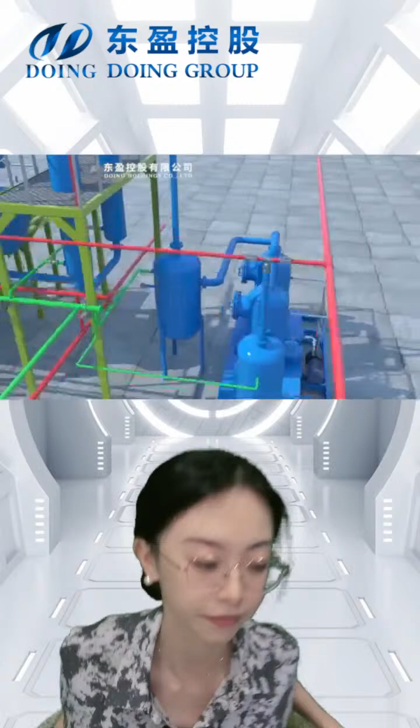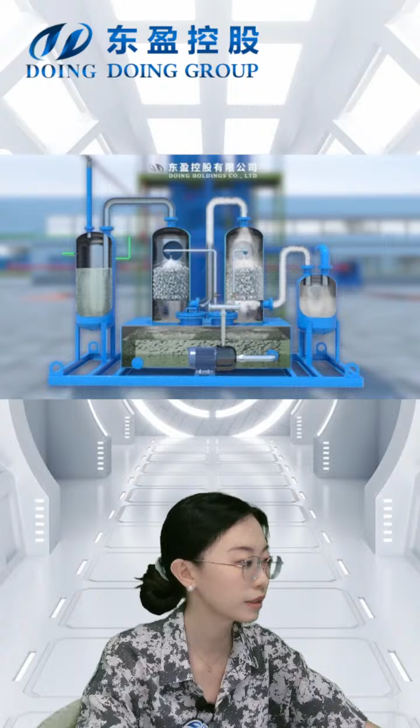Welcome, we are the Doing company, and we are a company manufacturing equipment for the transport and processing of waste tire and waste plastic pyrolysis plants.

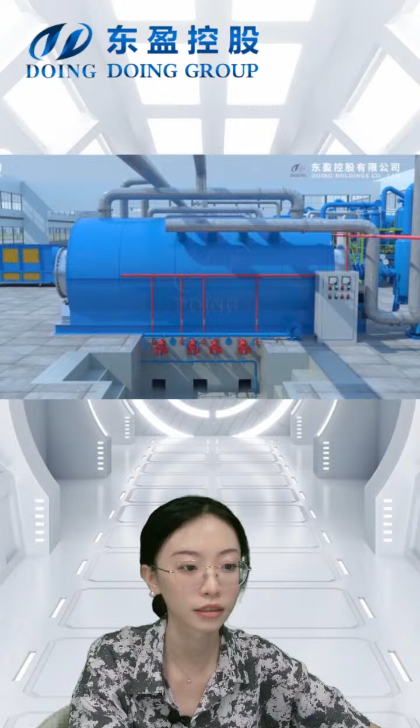We're just on air, so you can wait a moment. Today we're going to have an introduction of the full continuous pyrolysis plant, the batch type pyrolysis plant, and the semi-continuous pyrolysis plant.

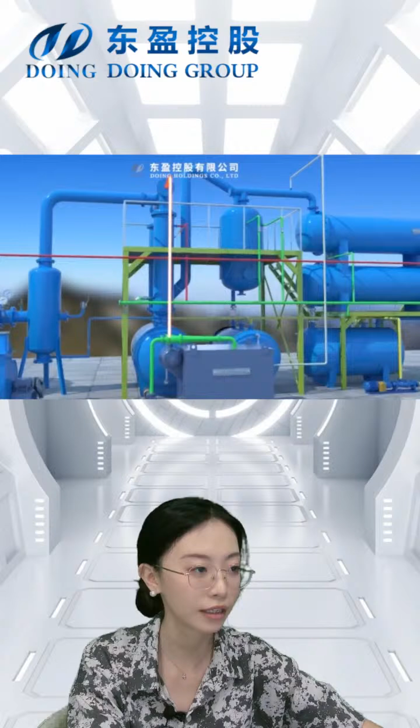If you're interested in this project, the pyrolysis oil project, you can come to China. You're welcome to come to our factory, to our company.

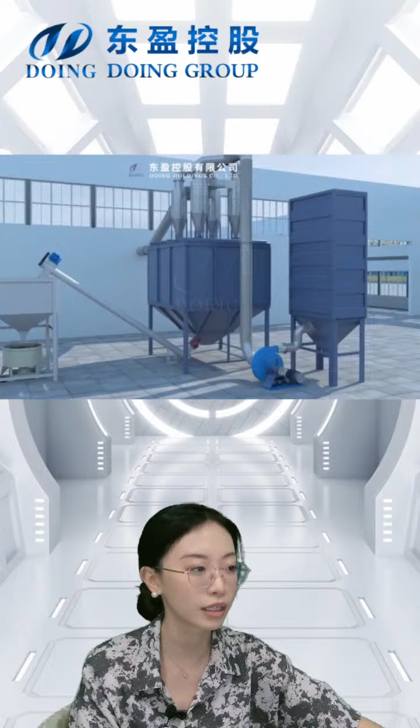Today we're going to introduce the main product of our company, the full continuous pyrolysis plant for waste tire and waste plastic. If you're interested, you can wait a moment, we are just on air, waiting for more friends to join our live show.

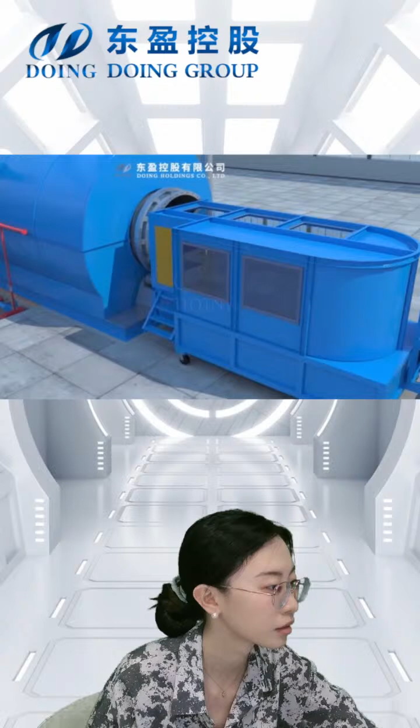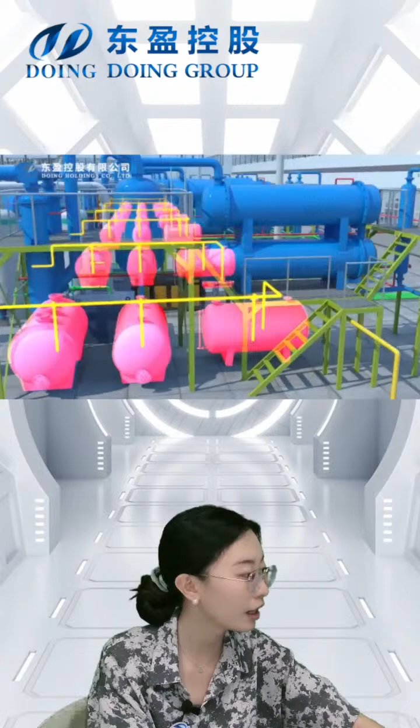Welcome, we are the Doing company. Our company works on waste tire and waste plastic pyrolysis plants, and we are located in China, in central China's Henan province. We are located in the capital of Henan province, Zhengzhou.

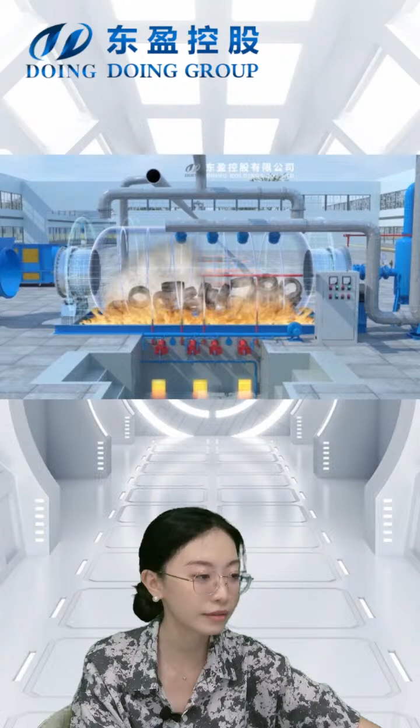And if you want further refining, you can get diesel from the pyrolysis oil. The diesel can be used in ferry boats, steamships, or heavy agricultural machines. So you can see our oil can sell widely and have a high profit.

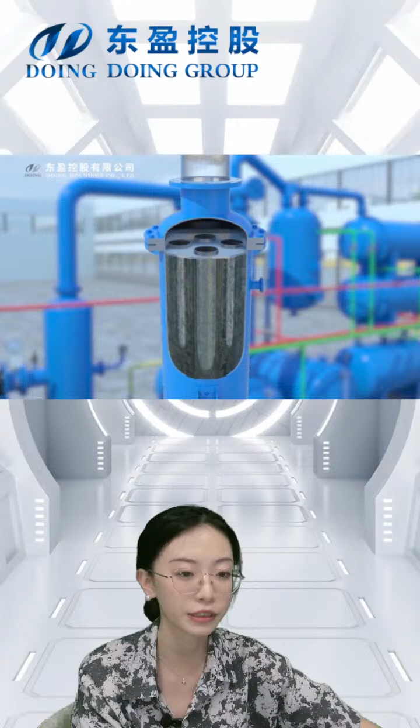Today I'm going to introduce our full continuous pyrolysis plant and the batch type pyrolysis plant. The 3D video above me is the batch type pyrolysis plant, so you can get an introduction about how this whole product works.

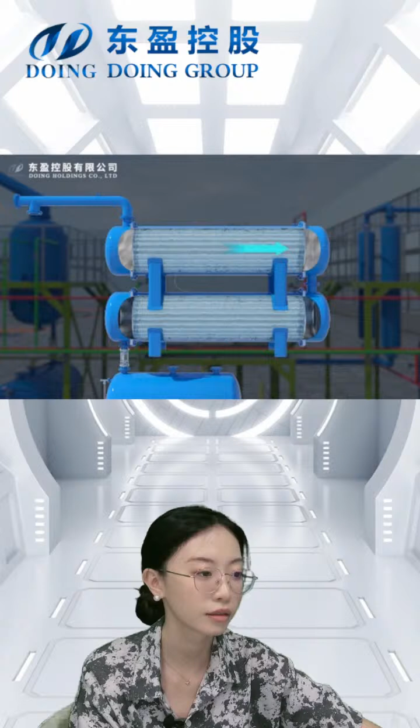Our company was founded in 2011, and we have a history of 13 years. We have had our own factory since 2018. So we have set up a good name and reputation in this industry, so you don't have to worry about the quality of our project, our manufacturing.

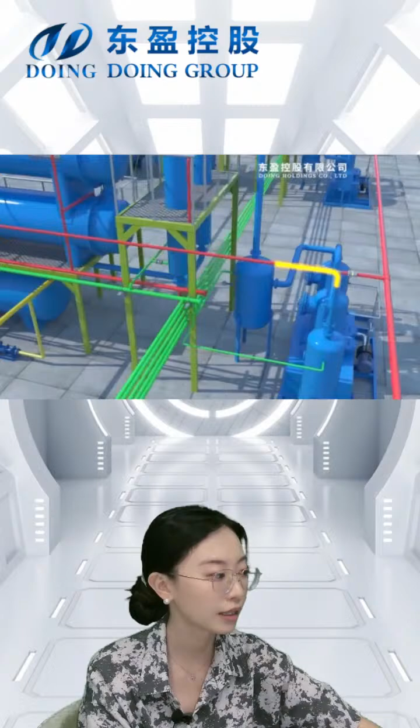About the oil yield: after pyrolysis, for example with waste tire, the oil yield can reach 42 to 45 percent. For plastic, different plastics have different oil yields. If you have pure PP, PE, or PS, the oil yield can reach 90%.

If your material is like paper mill waste, it depends on whether you have much water in your material. Dry material can reach an oil yield of 60%, and wet material can reach 20%. So it's all due to your material.

Maybe you are interested in the prices. We have different capacities of our machines and different types. For the batch type pyrolysis plants, we have 10 tons, 12 tons, 15 tons. For the full continuous pyrolysis plants, we have 10 tons, 20 tons, 30 tons, 40 tons, and 50 tons.

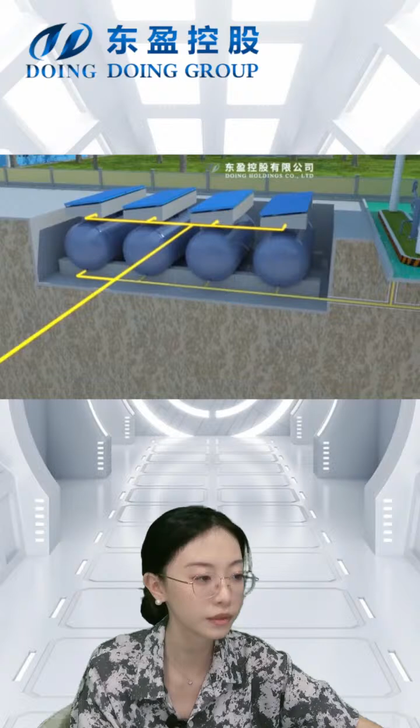So what does the oil do? Well, it is a fuel oil. The pyrolysis oil is a fuel oil. You can use it in common factories, brick factories, glass factories, boiler factories, or other heavy oil generators. And if you want to refine it further, you can refine it into diesel. The diesel can be used for ferry ships, steamships, or some heavy agricultural machinery.

After the pyrolysis, we not only get the pyrolysis oil, we also get carbon black and steel wire. The carbon black is also good for heating, and it can replace coal as a heating energy source, and it can also be a raw material for rubber or paint and so on. As for the steel wire, you can sell it directly to the steel smelter. So you can get profit from the pyrolysis oil, from the carbon black, and from the steel wire.

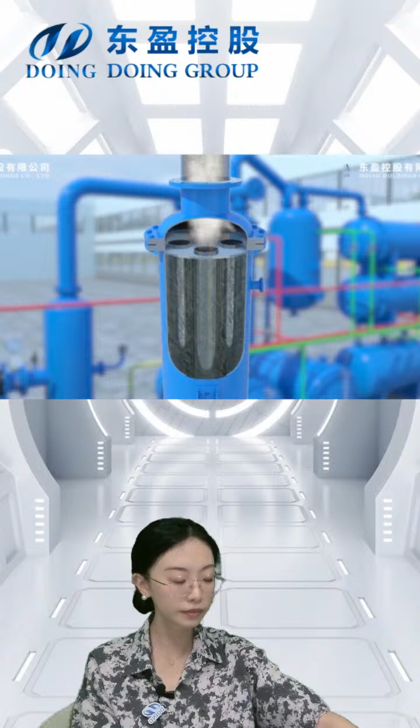Then there is the cooling system. We have 4 steps in the cooling system with a total of 7 condensers. The first step is 2 vertical condensers. Inside the condensers, inside the pipe is the oil gas, and outside is the cooling water to cool down the gas into oil.

And the oil will be temporarily stored in these oil tanks.

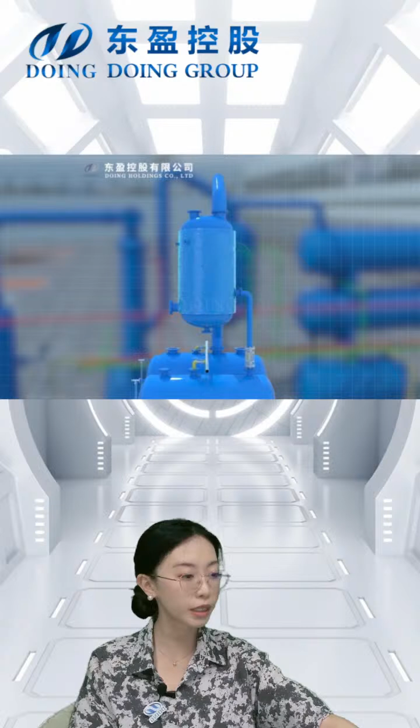The next one is the oil water separator. It has three purposes: the first one is to prevent the oil return from the reactor—it is a safety product. The next purpose is to cool down the oil gas into oil, and the third purpose is to clean the oil gas, because it passes through water.

And then there is the horizontal cooling system. Horizontal condensers have a large condense area and the greatest condense effect, because they have more than 37 pipes in them, and they fully condense the oil.

This equipment is the odor removal system. It is our patent equipment. I can give an introduction about this odor system, because it is our patent—you can only find this equipment in our company.

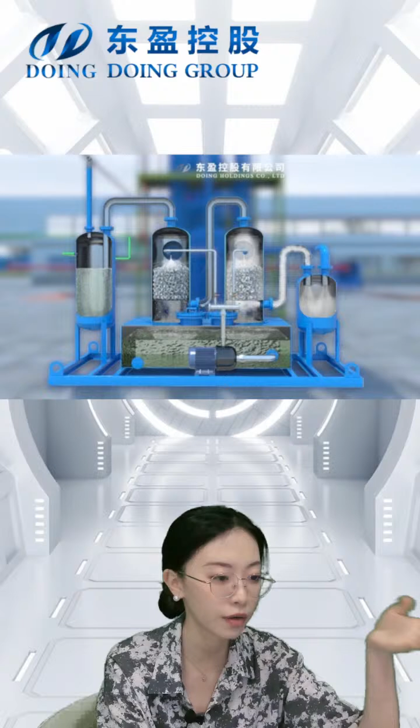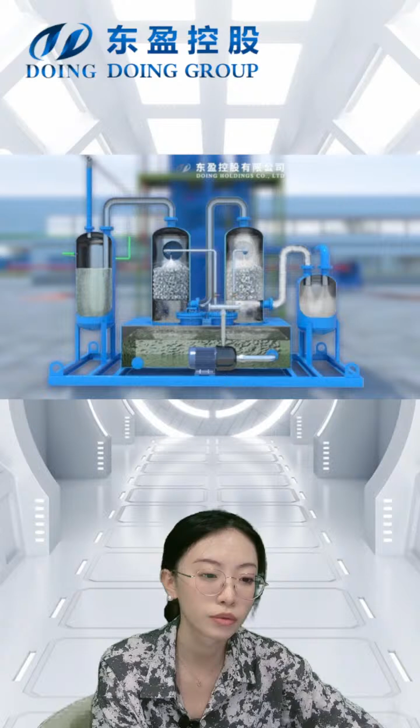What does it use? Just like the name, it can remove the odor from the oil gas going to the reactor, because we burn the tail gas, returning it to the reactor to be burned as fuel. But if we burn it directly, it has a bad smell, like NO smell or SO smell, causing pollution of the factory and environment. So we have cured the tail gas with this system, to remove the pollutants so it can be burned safely.

This is the odor removal system. As you can see, it passes through a buffer chamber, a cleaning system, and a safety system to remove the tail gas. Then it returns to the reactor as fuel, which saves our fuel material.

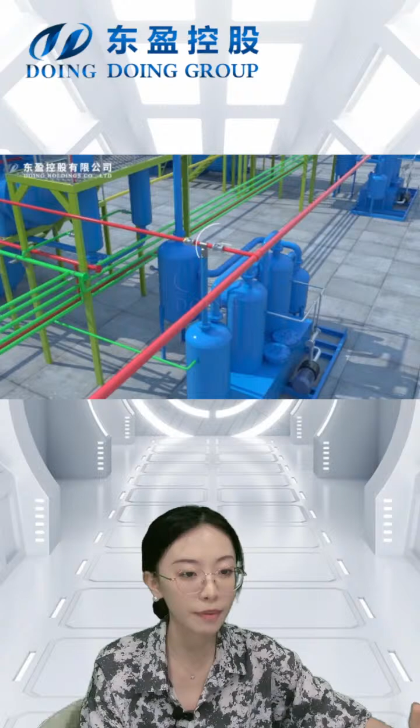This is the flue gas purification system, because we need to purify the flue gas before it is emitted. Different regions have different environmental standards, so you can comment your location and we'll introduce what your region's environmental protection standard requires.

We'll configure the flue gas purification system according to your requirements. This is a burning chamber. In case some tail gas is not being used, we set up the burning chamber to burn it. Because if we store it, some owners might say they want to store it for sale, but that causes safety problems. Our advice is to set up a burning chamber to burn it directly.

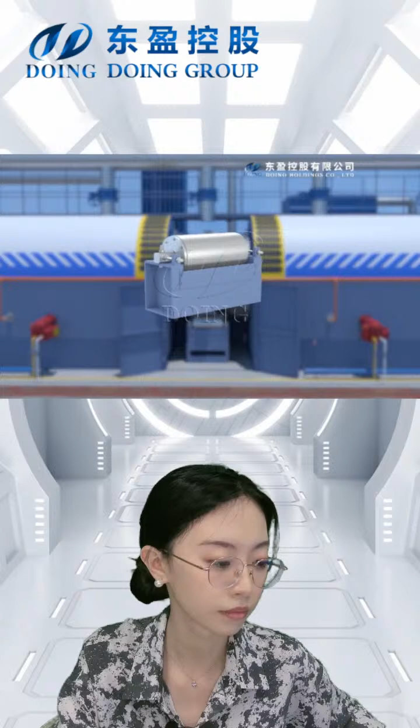And what we show in this video is the full continuous pyrolysis plant. It has the capacity for 30 tons, or 40 tons, 50 tons.

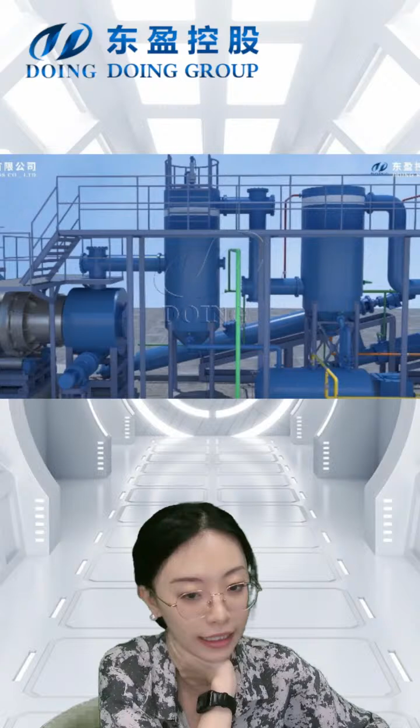For our continuous waste pyrolysis plant, the feeding, the pyrolysis, and the slagging are all running continuously for almost 40 to 60 days.

Like the batch type pyrolysis plant we introduced before, we can have the capacity for 10 tons, 12 tons, 15 tons each day. But it's not continuous. We have to run the pyrolysis for 10 hours and then stop to cool down the reactor and do the slagging.

So there will be a little waste of time for the slagging. But with the continuous pyrolysis plant, we don't need time for cooling and slagging - it all runs continuously at the same time. So this is the difference between these two equipment.

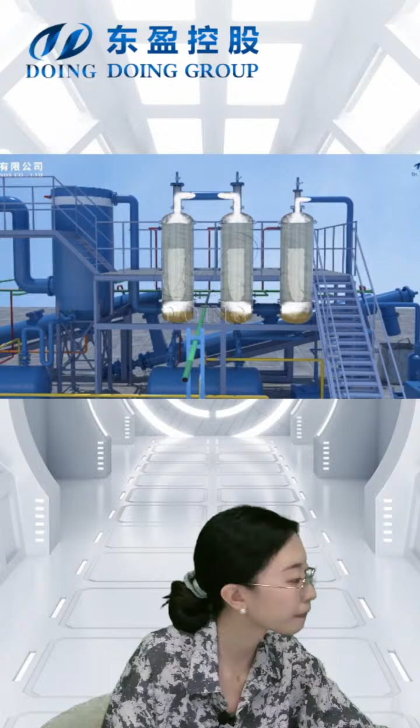But if you want to run this full continuous pyrolysis plant, you need to process the waste tire into rubber powder. We have to feed the rubber powder, not the whole waste tire, into the reactor to ensure continuous running of the equipment. The rubber powder needs to be 16 to 18 mesh.

And this is a reactor for this product.

Yes, it indeed meets the environmental standard. We have the flue gas purification system. Different regions and different countries have different environmental standards, and we have different kinds of purification systems. You can talk to our sales manager about where you want to start this project.

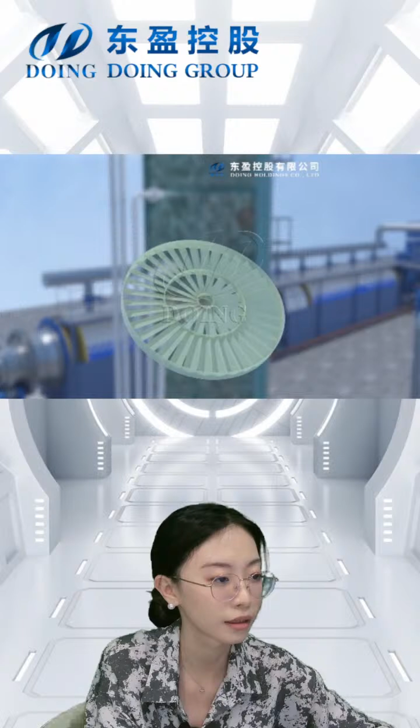Thank you, I'll be in connect with your company. Oh, thank you.

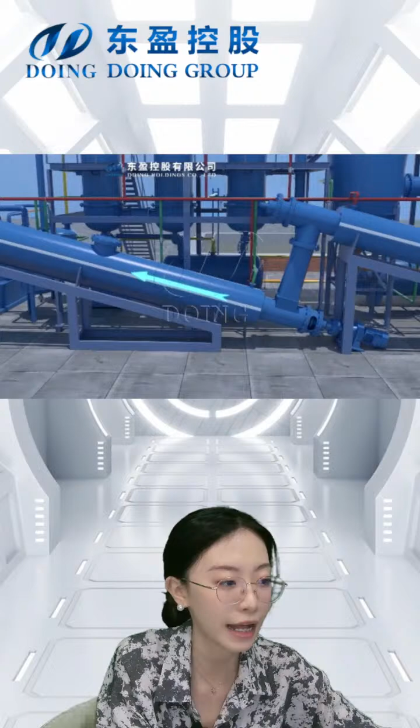And this is a full continuous pyrolysis plant. As for environmental protection, our purification system and our continuous feeding system adopt a special seal and anti-leakage structure.

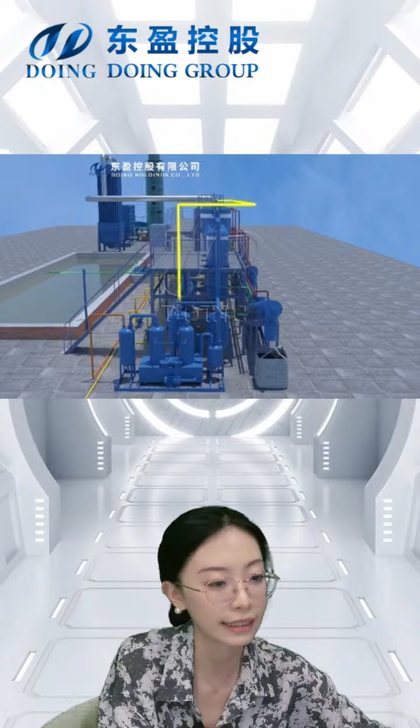So it is sealed with the material itself, to avoid oxygen going into the reactor, and meanwhile prevent the oil gas from leaking out. And this is our patent.

Welcome. Later I will give an introduction about each project.

And this is the reactor, this is the feeding system, and the slagging system, the cooling system, and the gas purification system.

And the first one is the feeding system. We need to feed the rubber powder instead of the whole tire, because we need to run continuously for about 45 days to 60 days.

And then there's the reactor. We'll heat it. You can heat it by the pyrolysis oil or by natural gas, coal, or wood.

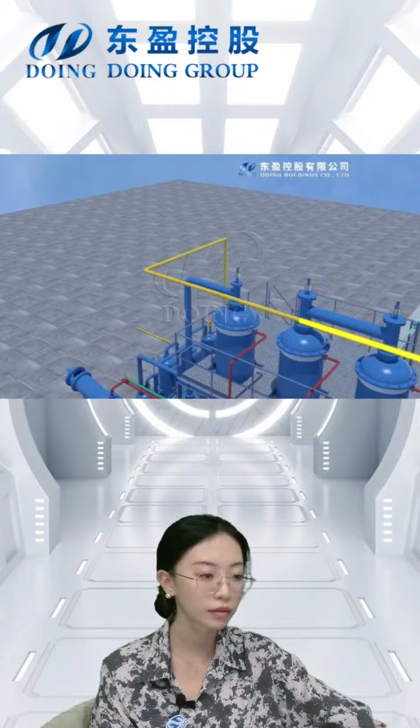And this is the safety system. For safety, our machine is equipped with an alarm bell, pressure relief equipment, pressure meter and so on. The design of the equipment pays great attention to safety and conforms to international standards, so you don't need to worry about safety if your workers operate it to standard.

And this is the full continuous pyrolysis plant. It can work continuously for 45 to 60 days, and you don't need to stop the process to cool down the reactor for carbon black discharging.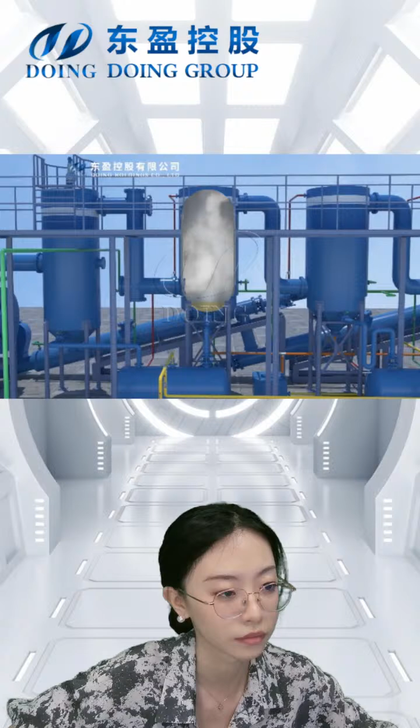We have nearly 14 years of history, and we have almost 17 foreign branch offices. Our customers are spread to nearly 120 countries from all over the world, each in Asia like Korea, Japan, or Thailand, or Mexico, Colombia, and South America, or Italy, France, Germany in Europe. We all have our customers. So if you are interested or want to start a project in each region, you can visit our customers, or you can visit our own factory in China. The transportation here is very convenient. And we have a branch in Nigeria, Africa.

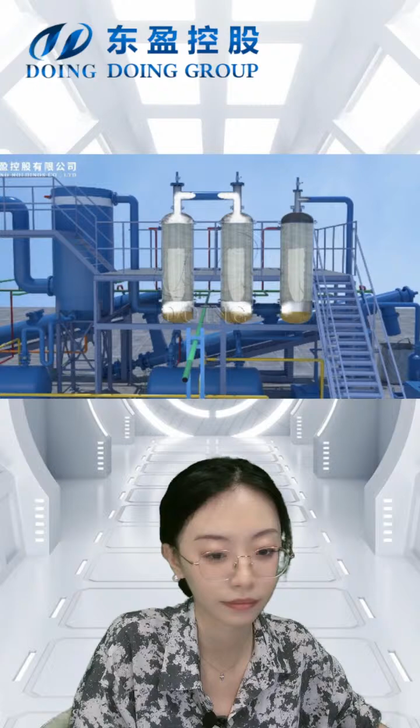Today I will introduce you to the batch type pyrolysis plant and the full continuous pyrolysis plant. Next week we'll have a live show about the semi-continuous pyrolysis plant. The difference between the full continuous and the batch type is that they have different feeding methods, and the fuel efficiency is very different, and the space required is very different. As for the full continuous pyrolysis plant, it's more automated.

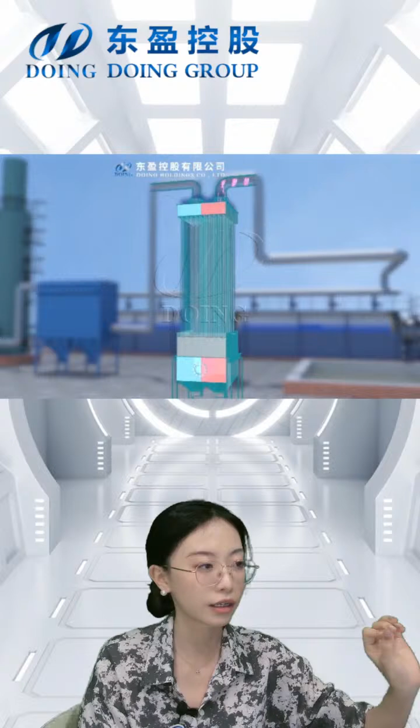You can use the PLC control system, and it is more labor saving. We only need 2 or 3 workers. It will save your money at the same time, because we don't need to stop the pyrolysis to cool down the reactor and to discharge the carbon black - it's all continuous. We can do feeding, reacting, and slagging at the same time for almost 60 days, 2 months.

This is the difference, or you can say the advantage, of the full continuous pyrolysis plant. Next week I will give you an introduction about the semi-continuous pyrolysis plant and tell you the difference between these 3 types of equipment and the advantages of each.